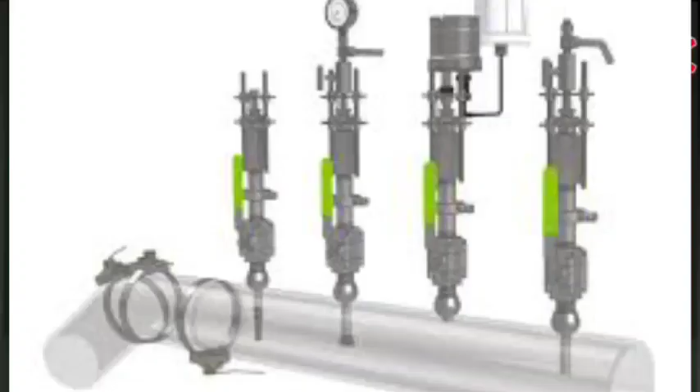So material selection and monitoring - for monitoring, do you use some camera or sensor? What do you do? Basically corrosion coupons are there, corrosion probes are there, then you have non-intrusive monitoring - you have a sensor outside, and ultrasonic thickness gauging, which is non-intrusive. You just attach the equipment outside and it keeps giving you the thickness reading. So there are various monitoring techniques: intrusive, which enters the system and gives you the signal for corrosion rate, and some systems give you external sensor readings.

But this corrosion doesn't happen in 1 or 2 days - it takes years to happen and reduce the thickness, maybe months or years. Maybe from 20mm to 19mm takes several months. So do you have to verify that on a daily, yearly, or monthly basis? How does it work? Basically I have some slides. Yeah sure, it's okay, no? All of you - yeah it's good, knowledgeable.

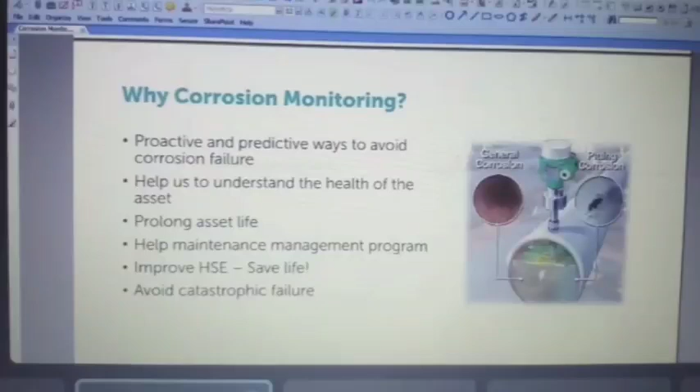So basically, we need corrosion monitoring, generally as a proactive and predictive way to avoid corrosion failures. This is one of the intrusive methods where there is a coupon that will go inside and interact with the process fluid, and corrosion will occur. From the coupon we get a signal and get to know the corrosion rate. If it's a coupon, it will undergo weight loss, and we measure the weight loss every 3 months, and get to know the corrosion rate over 3 months. With that we can find the millimeters of corrosion per year - how much millimeter lost per year.

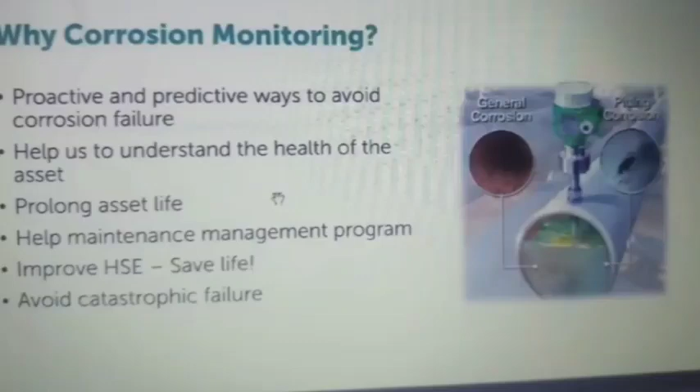But if it's a sensor or probe, we can get the reading instantly. We have an electrical resistance probe and a linear polarization resistance probe - those are all probes. If it's coupon, we have coupon. So basically, it's to predict the corrosion - in simple words. It's a 100-slide presentation, I'll make it very simple. So corrosion monitoring - changes in corrosivity are expected, but prolonged deviation is unacceptable.

For these reasons, where changes in corrosivity are expected, where you have different operating conditions, and where your corrosivity might change, you have to predict it or foresee it. And when you operate in a prolonged non-steady state or transient conditions, the corrosion rate will be higher than expected. So for these two events we want to see the corrosivity so that we don't end up in failure.

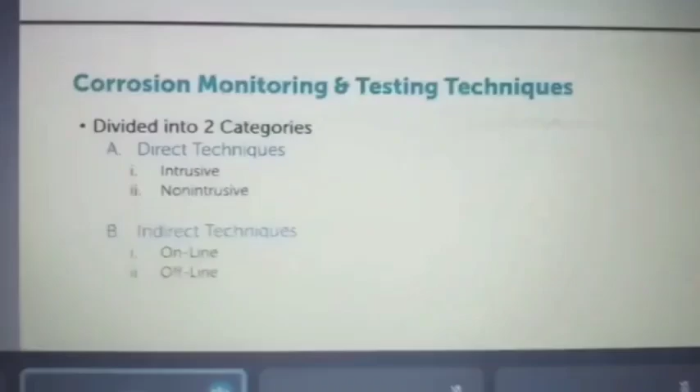So then we have two types of monitoring: direct technique, one is intrusive. Intrusive means what I showed in the first slide, it will go and interact in the system. Non-intrusive means it will be on the outside. Online means anything which is at the instance. Offline means anything taken as a sample, like sampling the process fluid and then taking it to the laboratory to find the readings. So those are all called offline, but anything you check directly in the system is called online. Anything which interacts with the system directly is called intrusive, and anything which does not interact but gives you the reading is called non-intrusive.

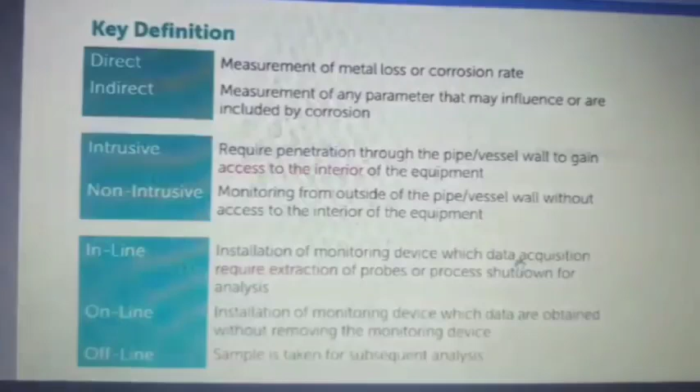So then we have intrusive and non-intrusive. We have physical coupons, electrical resistance coupon, internal visual inspection. And there are electrochemical methods like linear polarization resistance. These are all various techniques we have.

Non-intrusive is nothing but you can have a physical UT measurement at a local thickness location, and then you can find the difference in thickness over a period of time. So if I have a thickness measurement today and then after 6 months I measure the thickness again, I will get to know the wall loss. Like that, we have other non-destructive technique methods for monitoring.

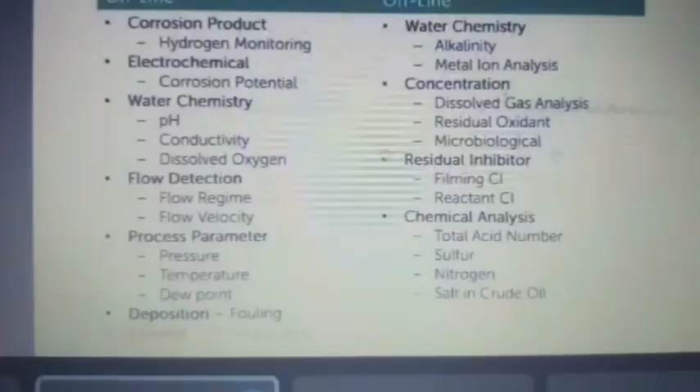And then we have a lot of sampling in the laboratory, like we can sample for pH, conductivity, dissolved oxygen, pressure, temperature, dew point, water chemistry, alkalinity. So we have a lot of things. When you take a sample from there, you can measure a lot of things in the lab and find out the corrosivity as well.

So generally what we use is corrosion coupon, electrical resistance probe, linear polarization resistance probe, especially in the oil and gas industry, hydrogen probe, and bioprobe. And when sand is coming from the well, we use acoustic sand detectors in case of sand production. So these are all the common techniques we use in the oil and gas industry.

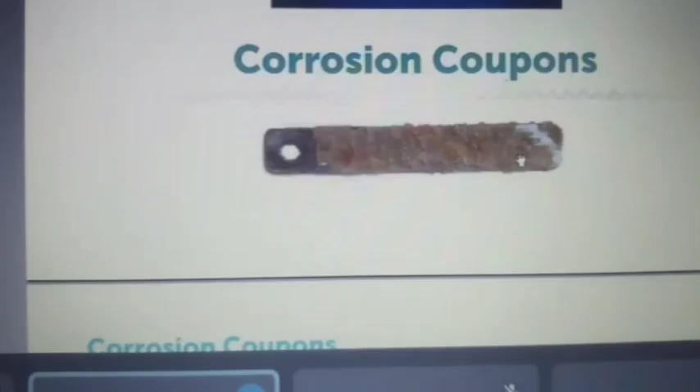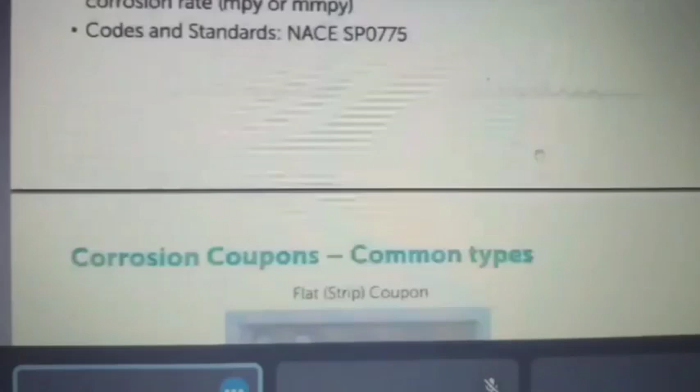So we have a standard for that, corrosion coupon NACE SP0775. The technique is very simple: expose a coupon to the process environment for a given duration, then remove the specimen to measure the weight loss. The weight loss taking place over the period of exposure is expressed as corrosion rate, either mils per year or millimeter per year.

So you have a flat coupon, you have this sort of coupon. There are various configurations in the form of coupons. Generally we use the flat coupons, or even when required we will use the disc or flush type coupon. If you want to simulate a weld, this HAZ zone you want to simulate, you have a coupon like this. If you want to use a stressed coupon, you can use like this.

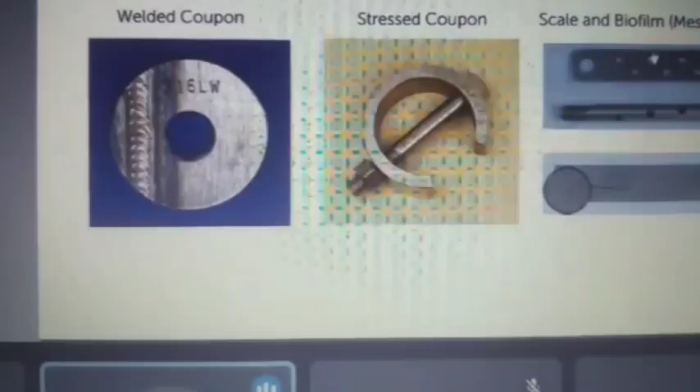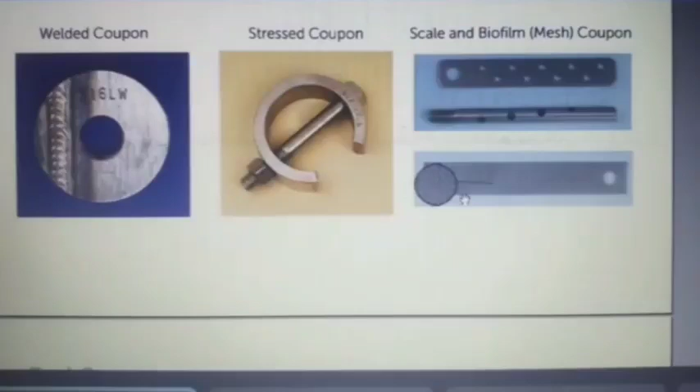If you want to have a scale or biofilm, if you have bacteria in the water or if your water's scaling tendency is high, you can use this. In this case you will have a weight gain instead of weight loss. In scale coupon, and most likely in biofilm coupon, it will catch the microbes, and you will measure the number of colony forming units per ml. But in case of scale coupon, it will have weight gain, it will form scale, and the increase in weight gain determines the scaling tendency.

You have various types of coupon and coupon holder. You have scale coupon wherein your scale will go and fit in different hole sizes. You have stressed coupon, you have welded coupon.

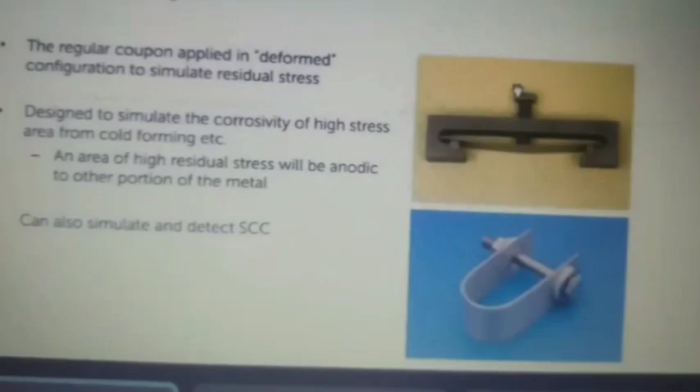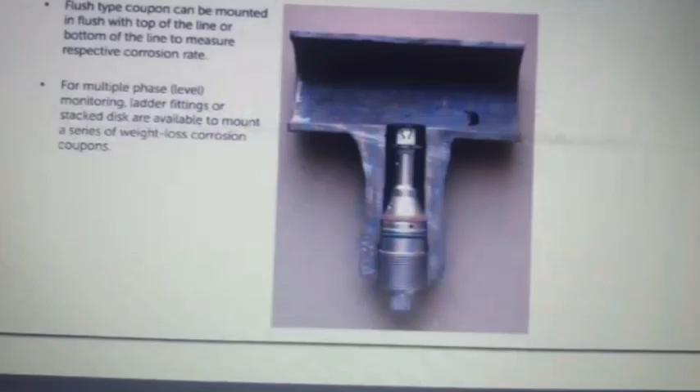And there are normal strip coupons which I showed. This is the flush coupon, strip coupon. Then you have a disc coupon, disc loaded into multiple levels if the pipe size is higher. And you have a ladder type coupon.

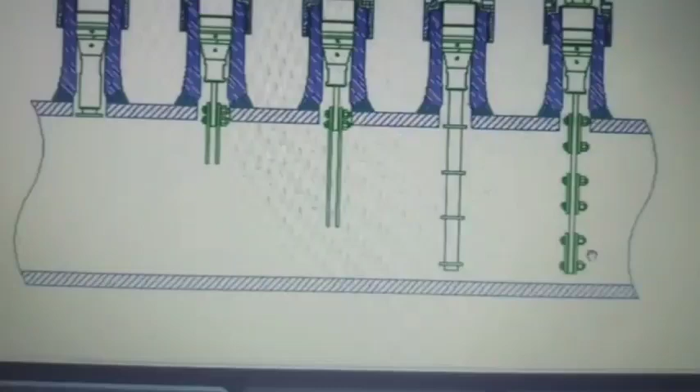Suppose your pipe is half flowing with oil or water, and half flowing with gas. Then these type of coupons will help you. Half of the pipe you will have water and oil, half of the pipe you have gas. So this will predict the gas corrosion rate due to the gases flowing at the top of the pipe, whereas this will predict the corrosion rate due to the water or oil in the pipe, and this one will predict the combined scenario of water, oil and gas.

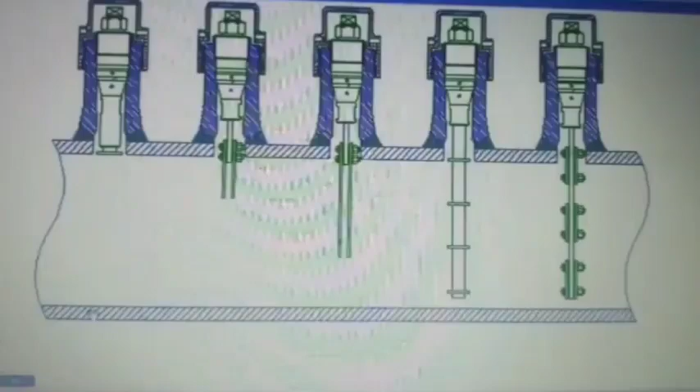So sometimes we use this also, ladder type coupon we call it. We also use this. This comes mainly when the pipe size is higher, like 30 inch or 32 inch, and then you have a two-phase flow, like gas and oil flowing in a separated fashion, where oil is flowing at the bottom and gas is flowing at the top, typical to a stratified wavy flow.

So for the corrosion coupon, how will you determine how many days to expose? Minimum length of exposure for a corrosion coupon is 3 months. But if you expect the system to corrode at a particular corrosion rate, you can divide 50 by the expected corrosion rate. That will give you the number of days you need to expose.

This is just a general calculation as per ASTM G31. If you expect your system's corrosivity to be like 0.1 mm per year, then 50 divided by 0.1 will be your exposure days. So if it is 50 divided by 0.05, that means 42 days. 50 divided by 0.1 means 21 days.

So you have this corrosion coupon NACE standard covering preparation, installation, analysis, and interpretation of corrosion coupons in oil field operations. So generally, how do we get the corrosion rate?

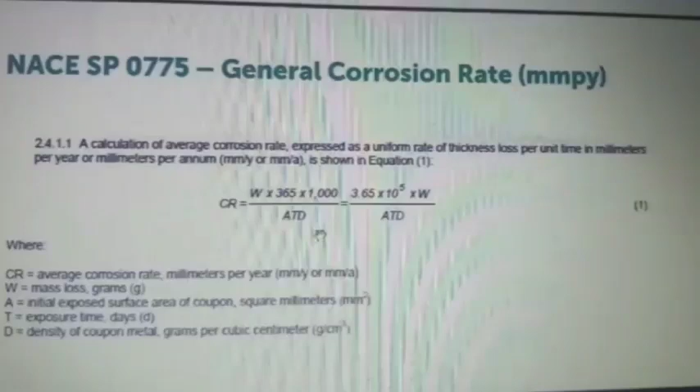Based on the weight loss: W into 365 into 1000, as given in SP0775. W into 365 into 1000 divided by A T D. A is the initial exposed surface area of the coupon. T is the exposure time in days, like 21 days, 42 days, and so on. D is the density of the coupon, which for carbon steel is basically 7.85 gram per centimeter cube.

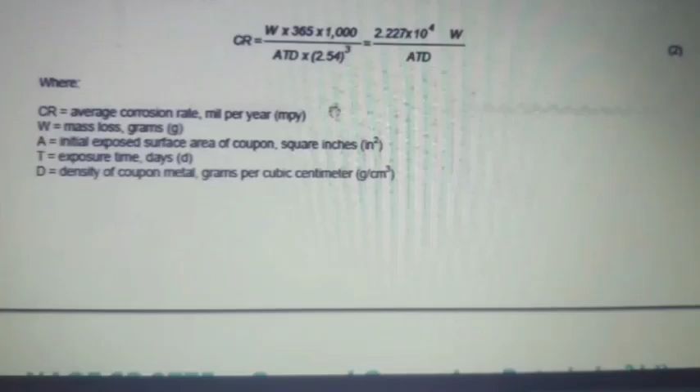So basically, if you get the readings like this, then if you put all the values together, you will get the corrosion rate. Then if you have localized corrosion, which is called pitting, the formula is different: depth of the deepest pit into 365 divided by exposure time in days. So once you get the reading, you can calculate it.

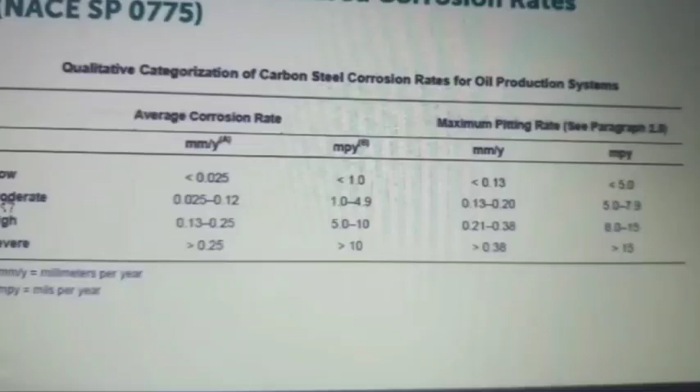If you have a corrosion rate less than 0.025 mm per year, that corrosivity is considered to be low. If you have 0.025 to 0.12, that corrosivity is considered to be moderate. This is the general corrosion rate, please note. If you have 0.13 to 0.25, then that is considered to be high. If you have greater than 0.25, that is considered to be severe.

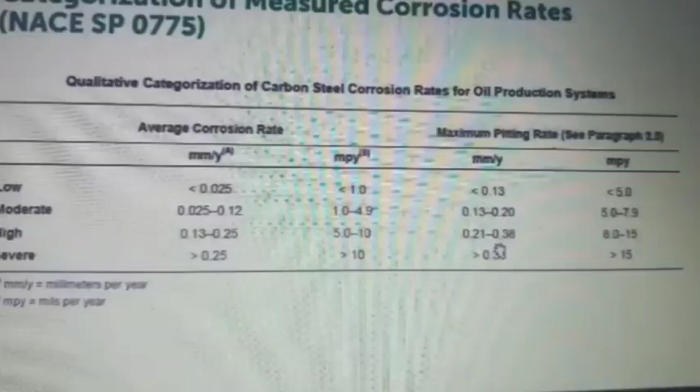And for pitting rate: less than 0.13 is low, 0.13 to 0.20 is moderate. 0.21 pitting means it's a localized area, like it's not a general corrosion rate, but it's in a very localized region.

So the limitation of the corrosion coupon is that it requires a long exposure duration, so it provides an average corrosion rate, not an instant corrosion rate. Suppose you don't have corrosion for 30 days, and then you have a very high corrosion rate for the next 30 days, and another next 30 days you don't have much corrosion but some corrosion. If you take a coupon reading, you don't know that the first month there was no corrosion, the second month there was heavy corrosion, and the third month there was light corrosion.

This you don't know, because it gives the average weight loss over 90 days. So you never know when the high corrosion happened or when the low corrosion happened. That is one of the disadvantages of the corrosion coupon. Nevertheless, we always use the corrosion coupon to complement the corrosion probe.

Used coupon cannot be reused. The coupon needs to be removed and cleaned for analysis. So these are some limitations.

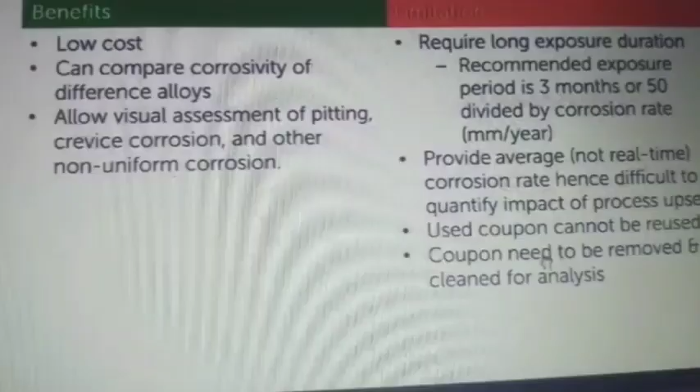Then we have the electrical resistance probe. This is like an electrical corrosion coupon, we call it an electrical corrosion coupon. Basically this is all equivalent to a corrosion coupon, but it gives instant readings.

It operates on the principle of the resistance technique. You have an element or a probe which is exposed to the process fluid. Now there will be a probe which is exposed.

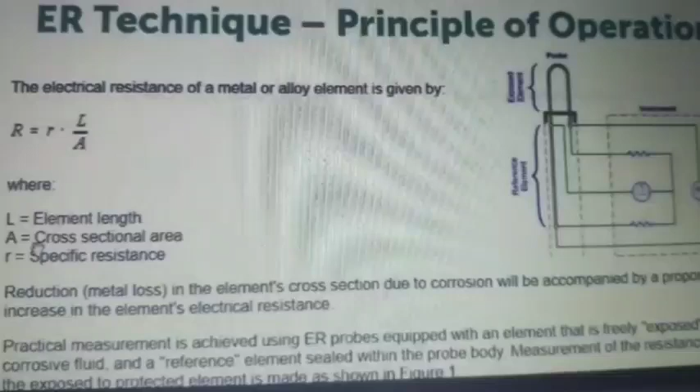Now we know that in electrical terms R is equal to rho L by A. Resistance or resistivity is equal to rho into L by A, where L is the element length and A is the cross sectional area. So resistance is equivalent to this equation.

Now when the probe is undergoing corrosion, the area will get reduced. And when the area gets reduced, your resistivity or resistance will increase. So based on that, if your resistance increases, that means your area is getting more and more reduced, which means the system is undergoing high corrosion.

If your area is reduced too much, then the resistance increases, and once the system resistance increases, which is measured by the instrumentation, it indicates that you are undergoing very heavy or high corrosion. So this is the principle of operation.

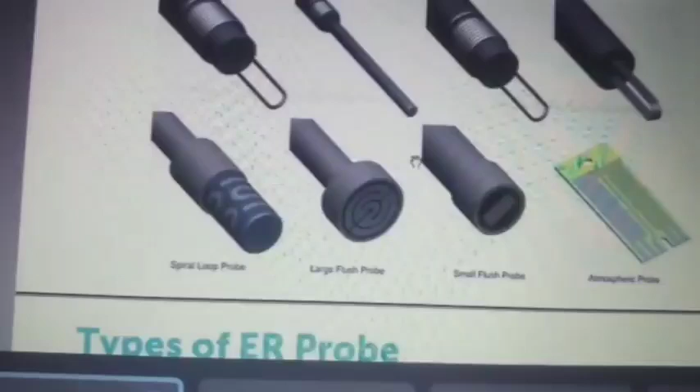There are various types of electrical resistance technique probes. Like you can use the same as a flush coupon or disc coupon. Here also there are wire loop probe, cylindrical probe, tube loop probe, and strip loop probe. There are various forms of probes.

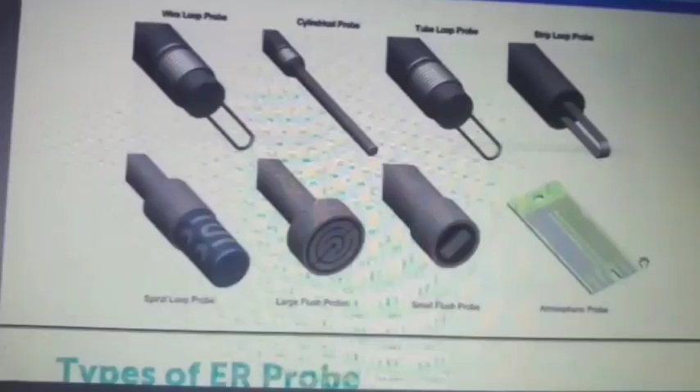So using this immediately means that at that time only you will find how much corrosion has happened, right? Yes, immediately you will come to know what the corrosion rate is by using these probes. So immediately when you attach this one, it says that this much corrosion happened in so many days, like that.

How is it? I'll show you, I think I have a slide for that. Okay, so the thing is that there are two types of probe in this also.

If your system corrosivity is very high, then the normal probe will be very useful. Normal probe means like this sort of probe, where the system corrosivity is high, then you will have lot of corrosion damage, and the resistance will increase, so easily you can detect it.

But if the system corrosivity is very low, not very corrosive, then the area reduction due to corrosion is less. So the sensitivity of detecting the corrosion rate becomes a problem. If the system is less corrosive, you will not find a small corrosion immediately, so you need to go for a high sensitivity probe.

We call it high sensitivity, meaning you will have a small thin tube or thin wire. Even if there is a small reduction in area or small corrosion, the resistance increases. So if you go for a large area, then you need a substantial amount of reduction in area due to corrosion.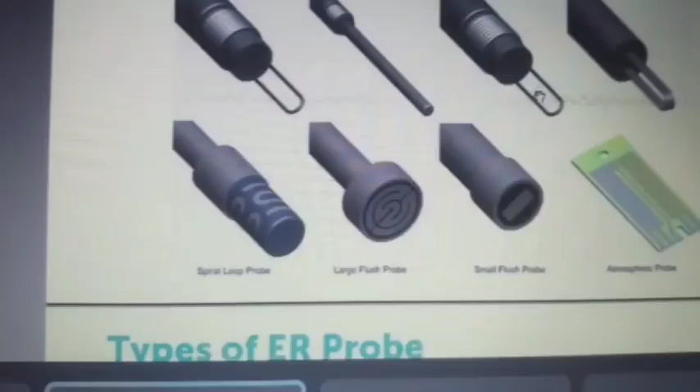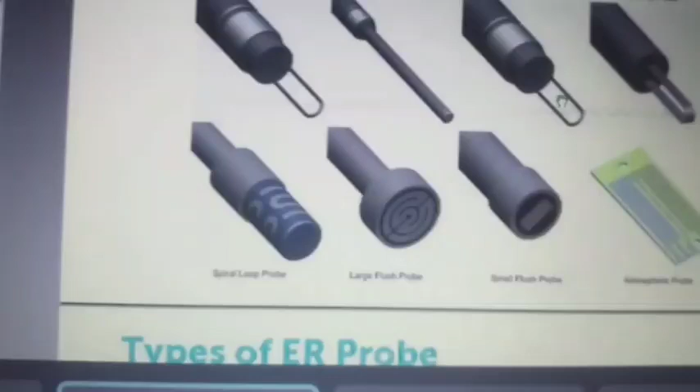Now let me show you how it works. The reason I'm saying this is that in some applications where there is less corrosivity, we go for a high sensitivity probe. When the system is having high corrosivity, we go for the normal type. When the system has low corrosivity, low anticipated corrosion rate, then we go for high sensitivity.

So this is the way it is, we will launch the probe here. There are three types of probe: one is fixed, you can see there is a wire loop here, then there is a retractable probe, and then there is a retrievable probe.

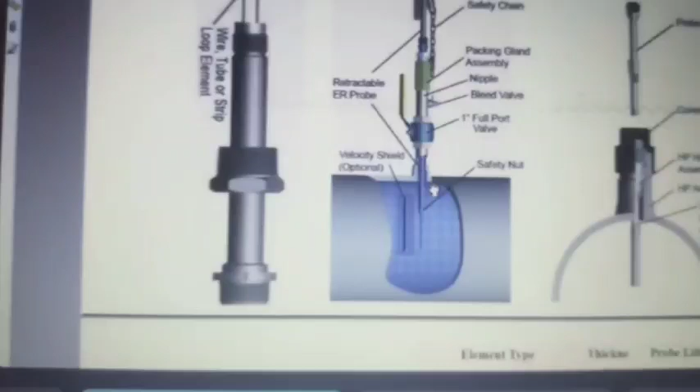This is temporary. Wherever there is a 2-inch drain nozzle, you can install this retractable probe, but you can install it only up to, I think, 300 pound pressure rating, after that it is not possible. The fixed probe will go up to 10,000 pound rating or 15,000 pound rating systems.

You can install this fixed probe, but the disadvantage is that you can remove it only after the shutdown, you cannot remove it during operation. The retrievable probe can be used up to 1,500 pound rating service.

And you can retrieve during the service. Okay, so this is what I was telling, like probe life, you see.

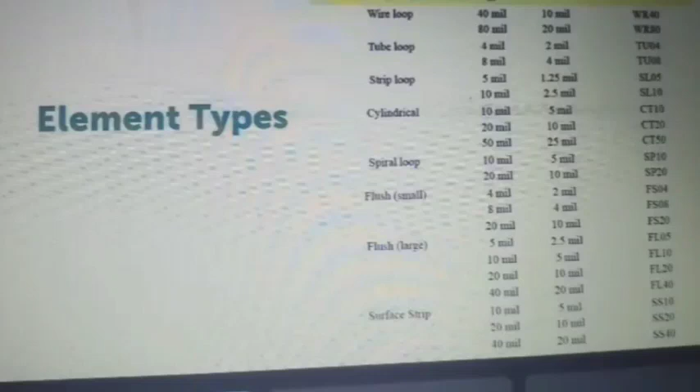Basically, the thing is that if you have a strip and all, okay, then the thickness is 10 mils, 10 milli inches. Whereas in the tube loop, the thickness is 4 milli inches. That means it's very thin. This is high sensitivity, whereas this cylindrical, spiral and the surface strip and all is low sensitivity.

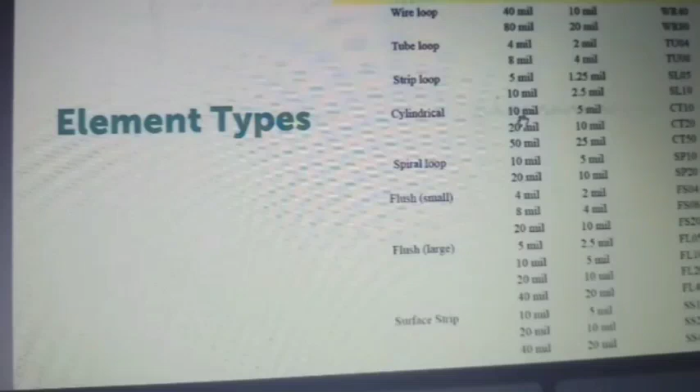But on the contrary, with a high sensitivity probe you will get the corrosion rate instantly, but the life is half. If you have 4 milli inches thickness, when it becomes 2 milli inches, you cannot further use it. It will corrode, and after 2 milli inches it will corrode faster, and then the probe will have discontinuity. The probe will corrode and the circuit will break, and then it will not pass signal. So when the probe size goes from 4 mil to 2 mils, you have to change the probe.

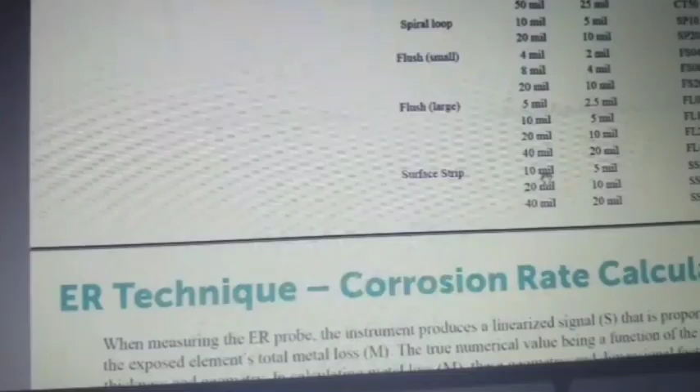Whereas in the surface strip, like 10 mils or something like that, you have a longer life. So this is one thing: a high sensitivity probe we can use, but we have to change it very frequently, like once in 2 months or once in a month. But if you have a surface strip, you can change it once in 4 months, once in 3 months, something like that. But as I said, it depends upon the system corrosivity. We have to select accordingly, based on how much reading we want. So the calculation is very simple.

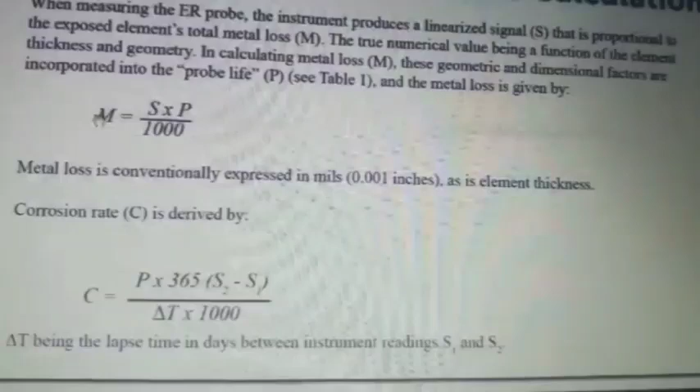You have a total metal loss, and there is a linearized signal given by this probe. The probe will give a linearized signal, then you have a probe life P, then you divide by 1000. So basically, if you have a probe life, you know that value.

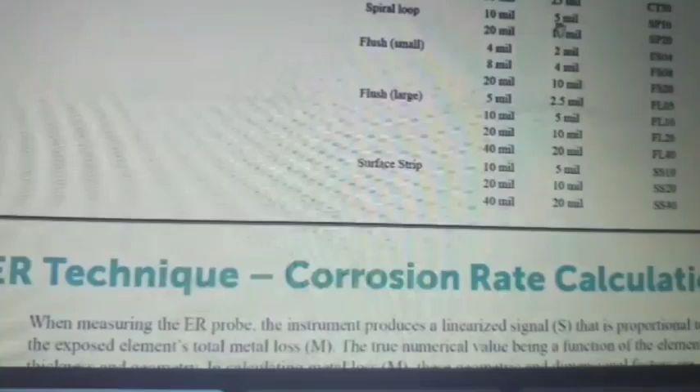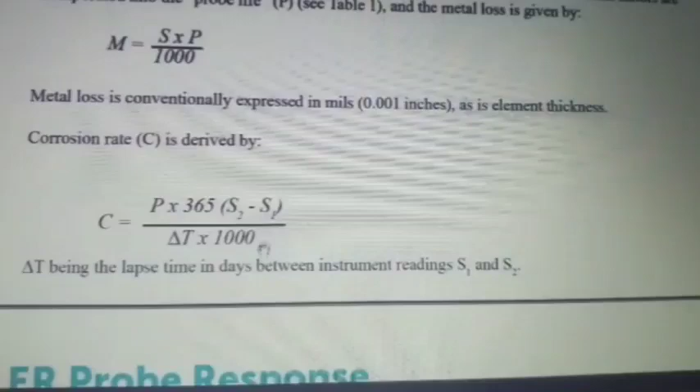Then you have a signal initially when you install, and finally a signal when you uninstall. So you take signal 2 minus signal 1, into 365, divided by 1000. So this gives metal loss, and this gives corrosion rate. Okay, there are two equations, so we can calculate. This is the response to your question, sir.

Now if you see this, actually response time with respect to corrosion rate: if you have a 35 milli inches thick probe, the response time for a similar corrosion rate, let us have a corrosion rate here, or a corrosion rate here. This is the way. This is response time in hours.

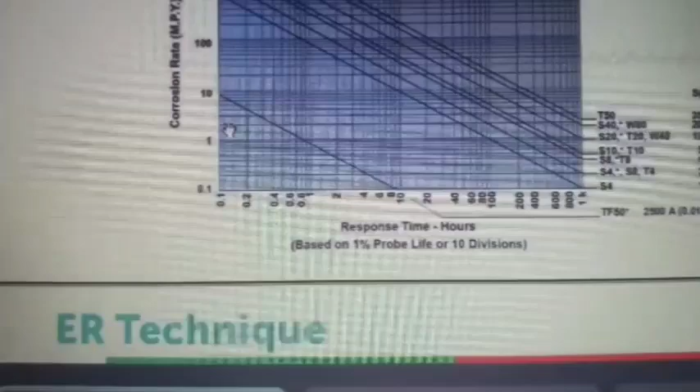When your system is having a corrosion rate of 1 mil per year, let's say 1 or 2 mils per year. If you have a 35 mil thick probe, then a system with a 2 mils per year corrosion rate, that probe will give you signal after 1000 hours. Whereas this one is a very high sensitivity probe.

If it has 2 mils, then this high sensitivity probe will give you that signal in 0.4 hour, that's the response time. It will give you signal in 0.4 hour if you install a high sensitivity probe. If you install a thick probe, then for 2 mils corrosion rate it will give response in 1000 hours.

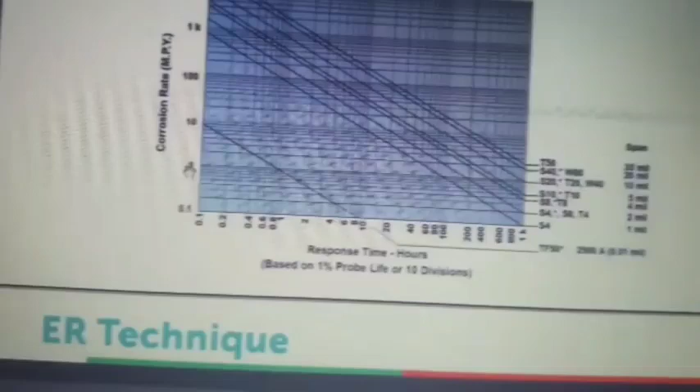So the thick one will basically take more time, that's the difference. So for a system which has low corrosivity, you need to use a high sensitivity probe. For a system with high corrosivity, you can use this thicker one.

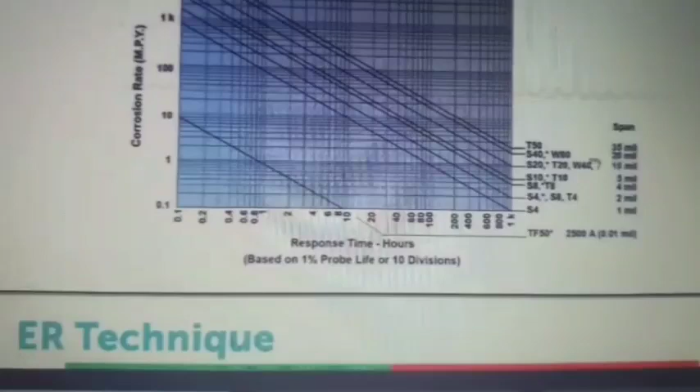So if your system has high corrosivity, say 100 mils per year, the high sensitivity probe will not work at all because it will corrode faster and totally get corroded. But the thick probe will give you a reading within 20 hours. So for a high corrosivity system, you have to use a thicker probe, whereas for a low corrosivity system, you have to use a high sensitivity resistance probe.

Hope I answered your question. When we want to know in a shorter period, then we have to use the high sensitive one. Exactly, sir. Fantastic, that's the point.

Okay sir, then we will go for the third probe, which is the linear polarization resistance probe. Basically, the principle here is an electrochemical technique. So this can be used only in aqueous systems, like water systems. I don't want to go into the electrochemical principle, which is more into corrosion science, that will be boring for you.

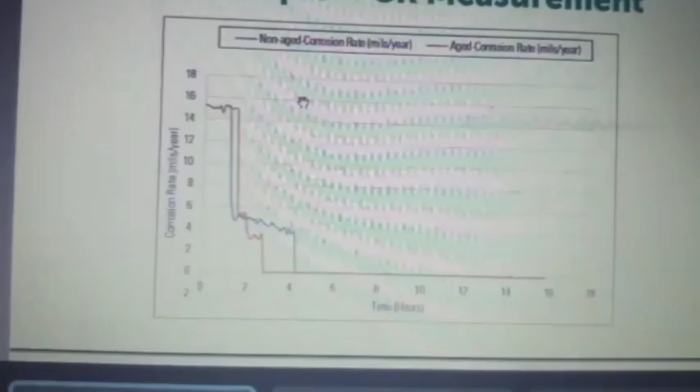So basically what this gives is instant corrosion rate. In both the cases, like corrosion coupon and electrical resistance probe, you need to calculate the corrosion rate with the readings. Whereas with the linear polarization resistance technique, it will give you instant corrosion rate. This is one technique where you get the corrosion rate on the screen, mm per year or mils per year.

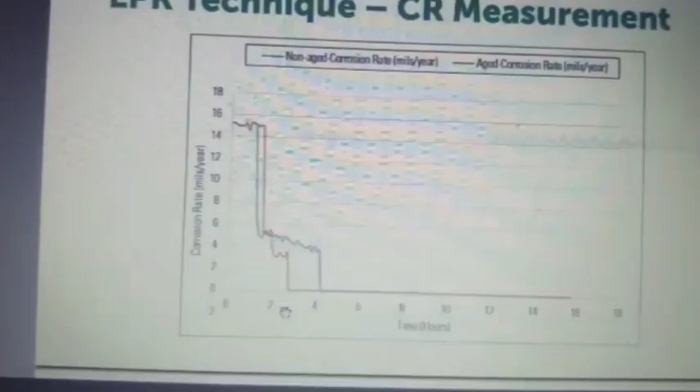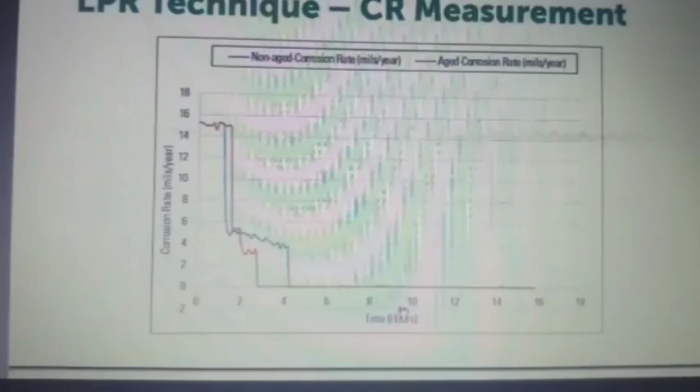Once I start introducing the corrosion inhibitor, you see it starts functioning, and after some time the corrosion rate drops. For the non-aged corrosion inhibitor, it takes 4 hours, and for the aged one, it takes 2 to 2.5 hours.

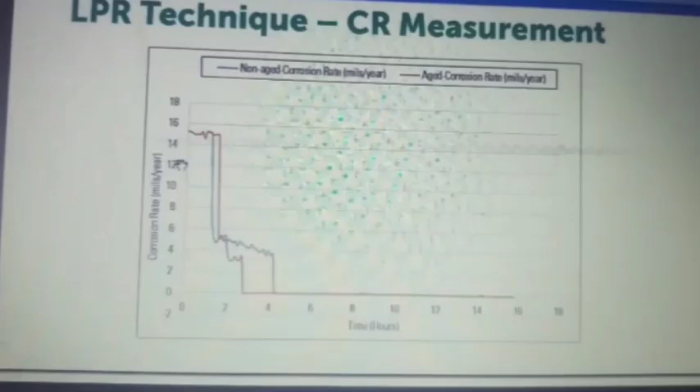We will not go into what is non-aged or aged, that's a different issue. But what I'm saying is you can directly see the corrosion rate in mils per year. This is the advantage of the LPR technique, it will give you the direct corrosion rate. There is no calculation involved, you don't need to do any calculation.

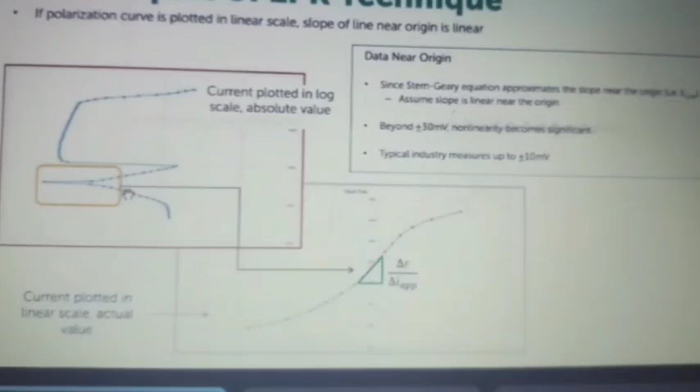The only problem is the LPR can be used only when there is an aqua system. When a water system is present, then only you can use the linear polarization resistance technique. This is because the principle of LPR is based on the electrochemical technique, and electrochemical means you need an electrolyte, water. You need an aqueous conductive electrolyte. Once you have the electrolyte, then this principle is applicable, and once you apply the electrochemistry principle, then you will get this reading.

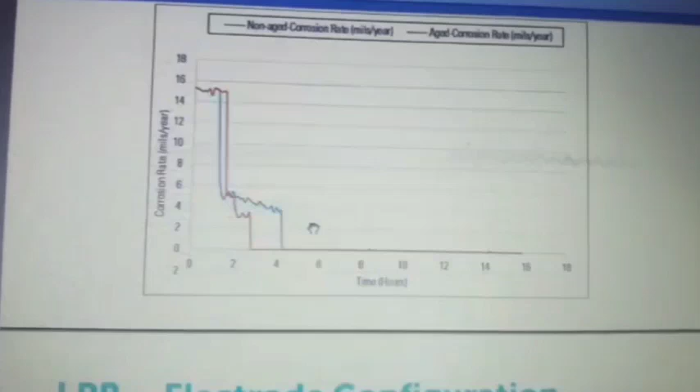But the electrical resistance probe, the previous one we discussed, can be applied anywhere. It has nothing to do with water or oil, it is purely based on corrosivity. If you have a corrosive fluid, the resistance will drop, or resistance will increase due to probe corrosion, and then you can use the electrical resistance probe.

But with the LPR probe, if it is an aqua system, you can use this one, and this is very fantastic because you don't need to calculate anything, it will give you the direct corrosion rate, instantaneous also. The thing is that it requires fluid.

LPR is used in aqua systems. Basically, we will use it in cooling water services or systems containing some water. Even that water should be conductive. In case of DM water, we cannot use LPR because DM water is non-conductive.

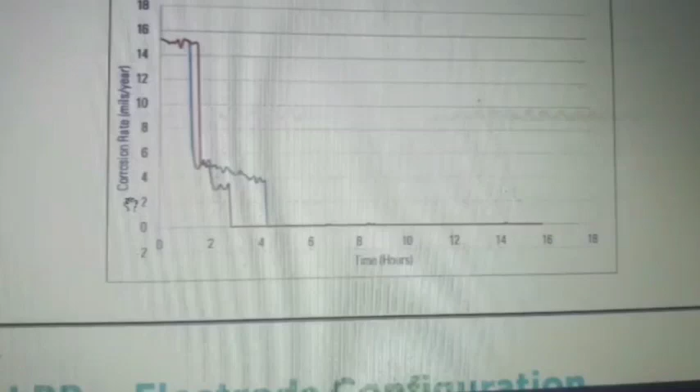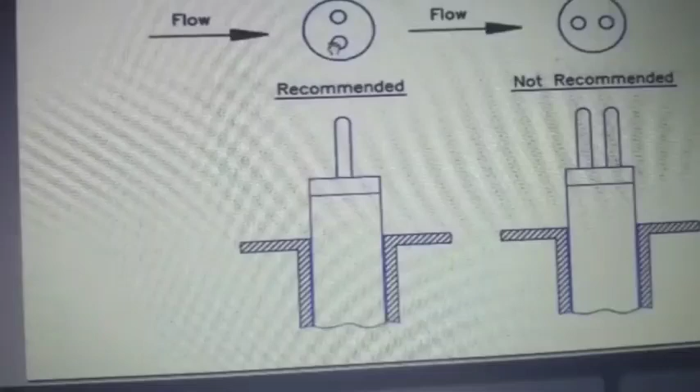So we have a lot of electrode configurations like 2 layer, 3 layer, 3 electrode, 2 electrode. The electrode position is such that if you have a flow, you can place the electrode in one way and not another. The electrode will be placed in a conductive solution, and one electrode will act as an anode and another as a cathode.

So the benefit is very fast data within minutes, well suited for water systems, can be used to monitor corrosion inhibitor performance. The limitation is it needs a conductive medium, so it's not suitable for most oil and gas processes, because oil and gas systems will have more oil or gas and sometimes less water. So basically we cannot use it in oil systems or gas systems.

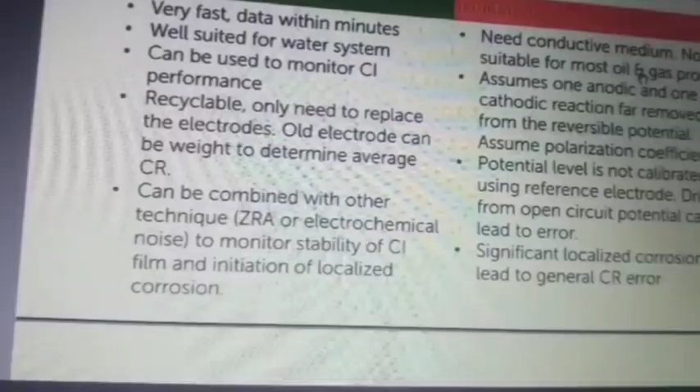Assumes one anodic and one cathodic reaction far removed from the reversible potential. This is because of the electrochemical principle.

So then we have hydrogen probes. I think this is sometimes used when there is a need to detect hydrogen evolution due to corrosion reaction, when due to some corrosion reaction there is hydrogen charging into the metal. Like last time we discussed about sulfide stress cracking, wherein hydrogen is charged into the metal, and then the hydrogen will come out of the metal. So that hydrogen we can capture in hydrogen monitoring, and based on that we can determine the corrosion rate or the cracking tendency.

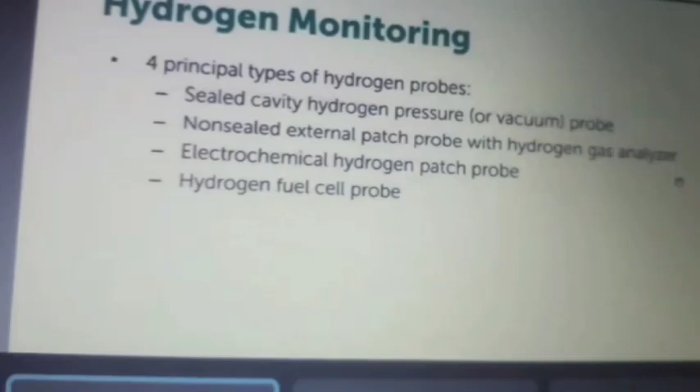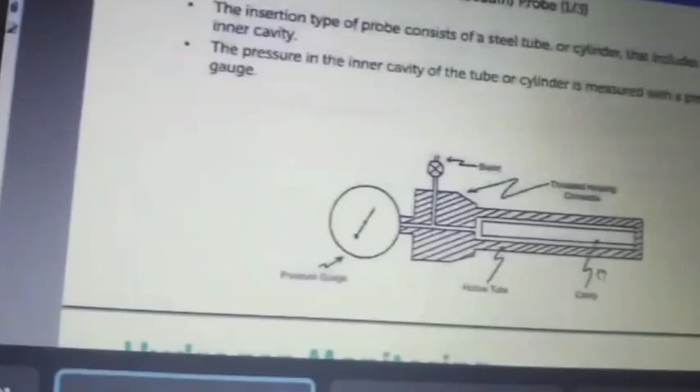There are various types of probes. You will have a sealed cavity probe, and then you have a vacuum probe. Mostly this probe is used because it is non-intrusive. The rest are all intrusive, meaning they go into the system.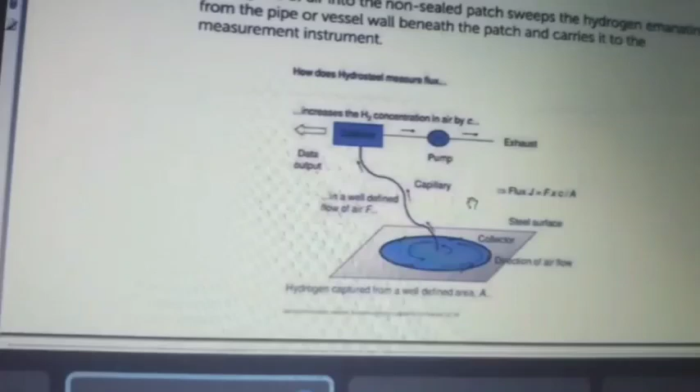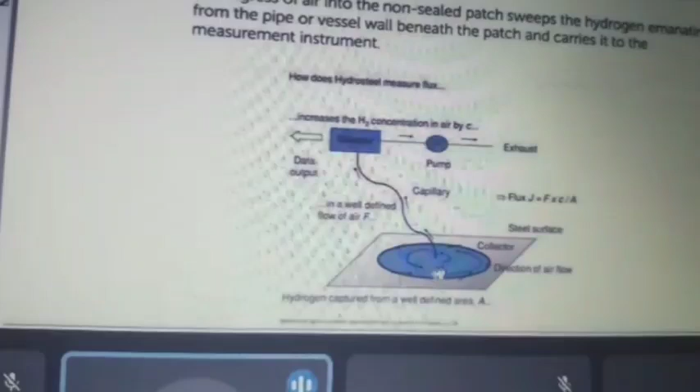I'll tell you briefly what flux thickness ratio is, because this principle is based on Fick's first law of diffusion. Flux J equals F into C divided by A, where A is the area, and this formula is used. C is the hydrogen concentration captured from a well-defined area, A is that area, and F is the flow, the total amount that is taken from this area. J is the flux.

Now this flux is calculated with respect to a particular thickness of the pipe, so that is called the flux thickness ratio. The flux thickness ratio is correlated to corrosion rate, and it is also correlated to cracking tendency.

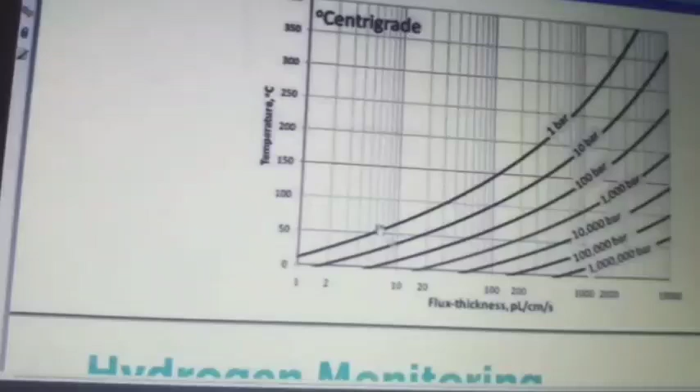Now for wet H2S damage, if it is 1 bar, 10 bar, 100 bar, 1000 bar, there is a chart for that. Is the steel more than 18 mm thickness? How is the quality? Is it sour service? If yes, then the total activity we measured is 100 to 10,000 bar.

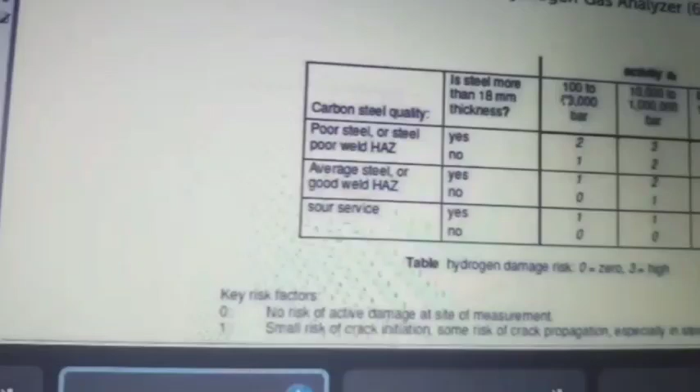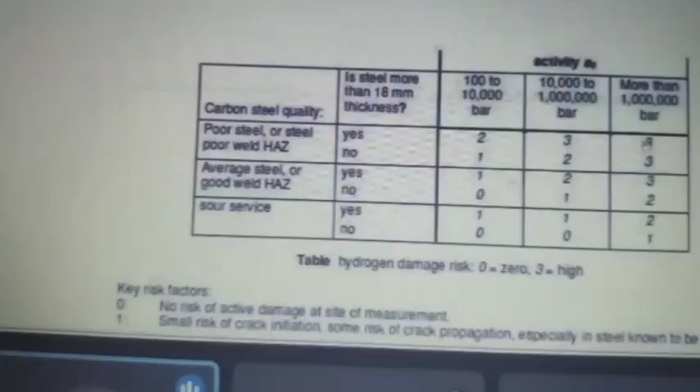Then there are risk levels: 0 is no hydrogen damage risk, 3 is very high. 1 means small risk of crack initiation, some risk of crack propagation, especially if the steel is known to be susceptible. So this is less risk, moderate risk, high risk, and 0 means no risk. Based on that, the flux thickness ratio converts to a hydrogen partial pressure or activity, and the hydrogen activity is converted to whether the risk is no risk, low risk, medium risk, or high risk.

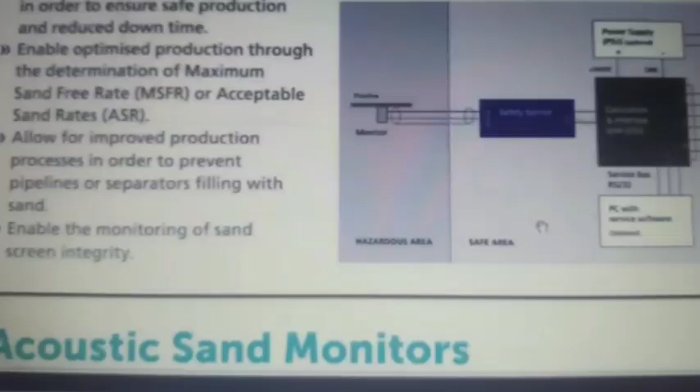These are all given by the vendors. Then when sand is produced from the well, there will be an acoustic sand detector, since sand is coming along with the fluid. You have to detect how much sand is coming, because the sand will hit the wall and start erosion corrosion. So you need to find that also.

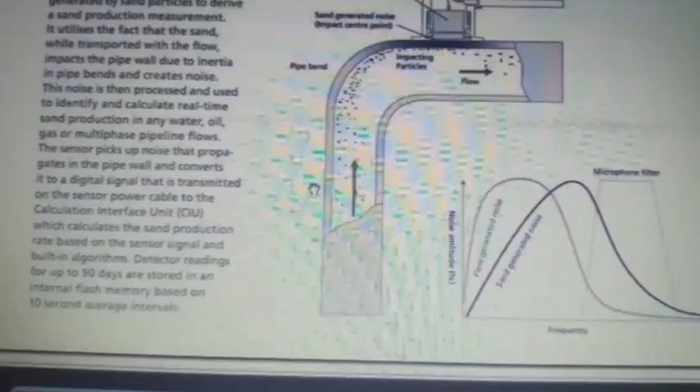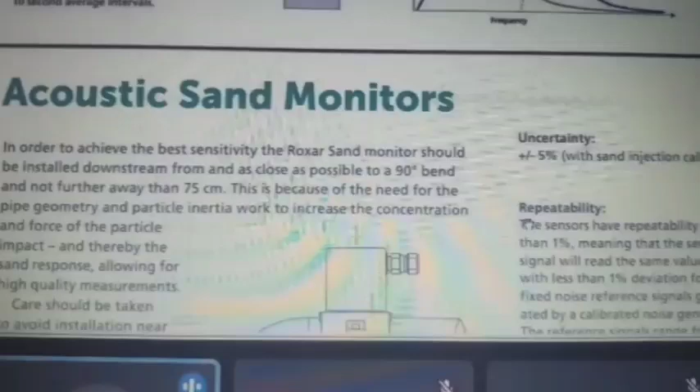You attach the sand detector to the pipe wall, like at a horizontal-to-vertical elbow or vertical-to-horizontal elbow, depending on the elbows in your isometric. After that elbow, you attach the acoustic sand detector. The impacting particles hit the wall, and based on the number of impacts, the detector will detect and filter out the noise, giving you a sand loading value, like sand milligrams per minute, or how many grams per minute it is loading.

So that much it will give. But all sand will not hit that one, no? Some sand may go below also. Yeah, that is correct, sir. Very good, sir, that one is correct.

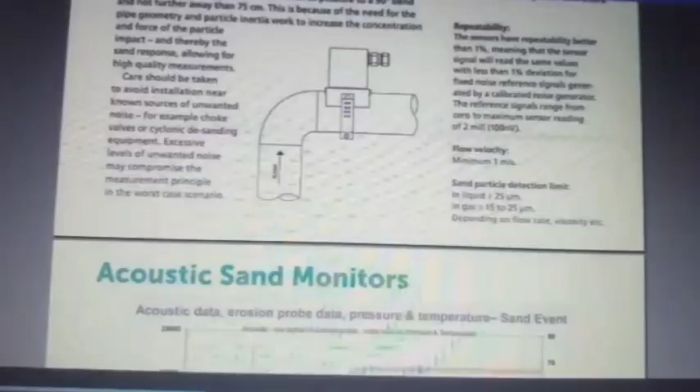What I am saying is, the sand particle detection limit in liquid is greater than 25 microns, and in gas is 15 to 25 microns, depending upon flow rate and viscosity. So you are right, the system has some limitation, some minimum particle diameter that it can detect. And the corrosivity is only greater after 70 microns. Till 70 microns it will get loaded, but it will not be corrosive or erosive basically. So that's how it is.

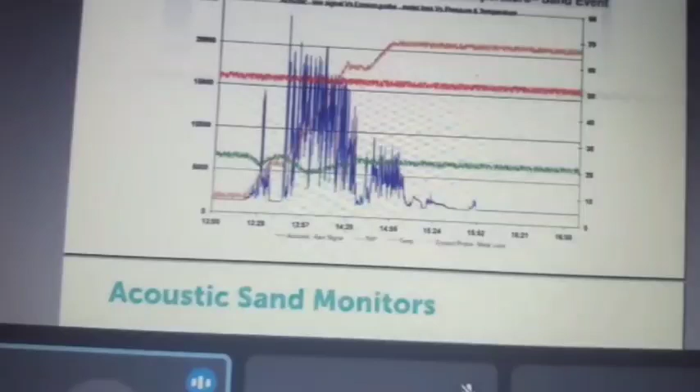This is one of the sand data actually. Suppose this gives you the metal loss, that yellow, and this is the acoustic raw signal. This is a period where they have seen the sand loading, from here to here, and here also some sand loading. This is the acoustic raw signal. The acoustic sand detector has detected some signal.

The sand is loading too much in this period. Now if you see, this is the metal loss, this erosion probe metal loss, this orange color. Initially the metal loss is low. In the event of the sand, the erosion rate increases. When the sand loading is not there, the erosion is not there. Then after, when the sand loading starts, the erosion starts, and then there is no sand loading.

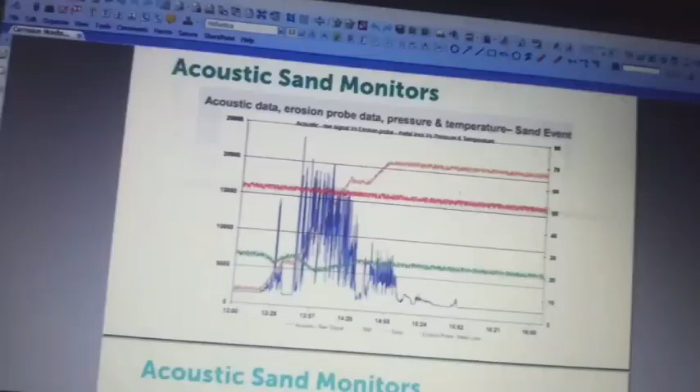So there is some flat region, and then again there is some minimal sand loading, so there is an erosion rate. You can see that very clearly, that based on the sand loading, the erosion rate increases. Initially there was some sand loading, so some minimum erosion rate jump, then it is flat, and then there is a huge sand loading. Then there is a higher jump in the erosion rate because the sand loading is high, and the duration is also very high. Then there is a minimal sand loading for a shorter duration, accordingly the erosion rate jumped to a very small limit and then stayed. There is no sand loading after that, so the erosion rate is constant.

You can see that? Yeah. You can understand this graph? Yeah, so that's how it is. Similarly, another temperature where the sand loading is there and all. So this is all about monitoring, sir. In oil and gas, we use all these types of monitors. And nowadays, we are using one more thing.

So, this is finished or? No, it is finished, I am trying one more thing. Let me try one more, one last thing is there. Nowadays we are using a non-intrusive probe. I want to show that. That's it, okay, allow me to show that.

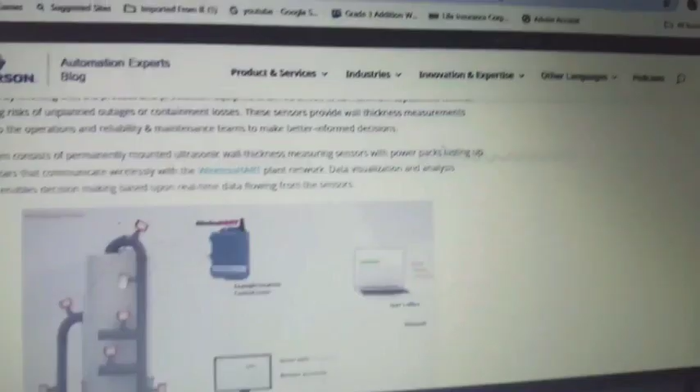So this is called permasense. Nowadays we are more using this UT probe. So it's a UT type probe, there is a data sheet. This is a UT type probe, permasense they call it.

So it will have just a probe, and that probe detects the UT signals with respect to thickness loss, and that transmits to the receiver. This will be a transmitter, this will be a receiver, wireless receiver, and then this wireless receiver will transmit that thing to the computer which is connected to it. And then from that we can use the data to get the corrosion rate. So this is how today we are using these permasense UT wireless probes.